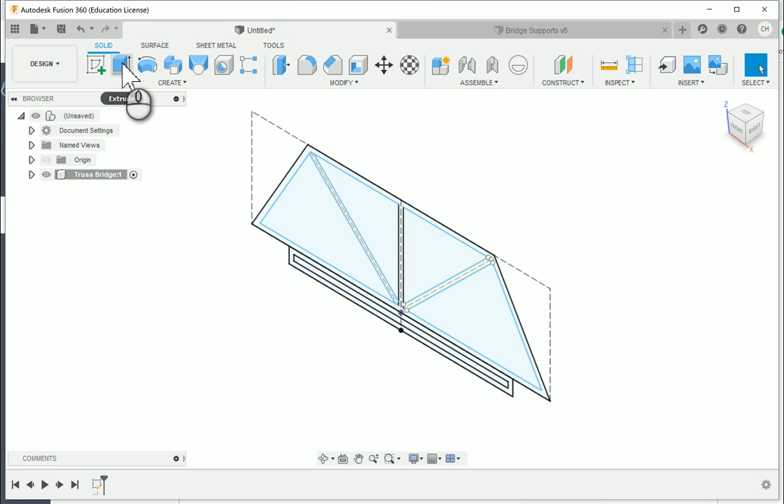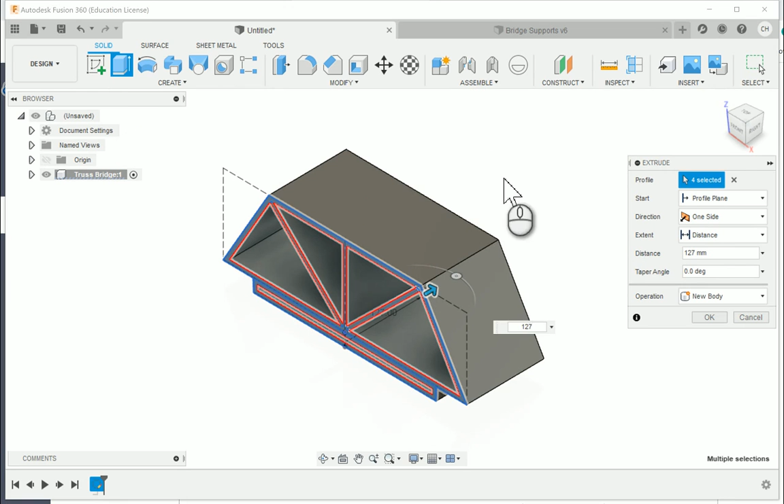I'm going to select my geometry, choosing these profiles here so you'll see this will go through. I want to choose the cross bracing as well as the area down below that I want to use for our particular projection. 127 millimeters is the width of our bridge, and I'm going to go ahead and say OK. This will go through and give me a truss bridge that's kind of solid like this.

Now, in order to accurately model this, I'm going to click Create a New Sketch, and I'm going to choose the work plane that would go through. Now what I can do is actually I want to go to Construct, and I want to go ahead and say for a work plane that is an offset plane.

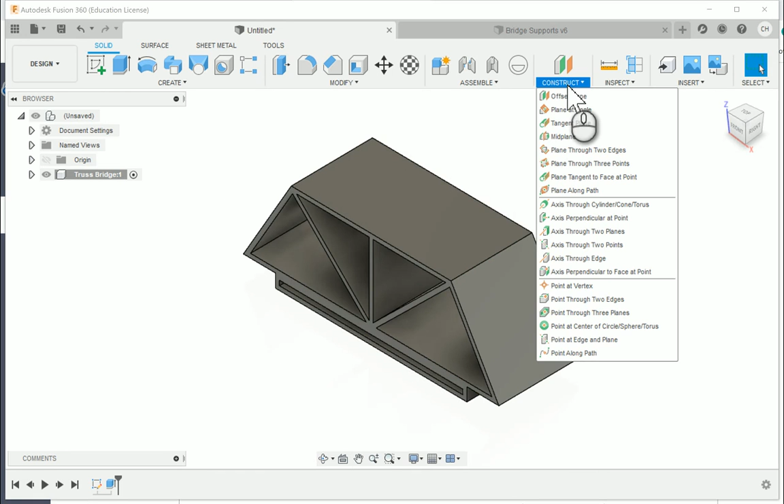And when I choose the offset plane, I can also zoom out here a little bit. Here we go. And I know that that's going to be 127 millimeters out to the very end, because that's right in the center. So I'm going to be right there on the edge. I'm going to go ahead and create a sketch right here on the work plane.

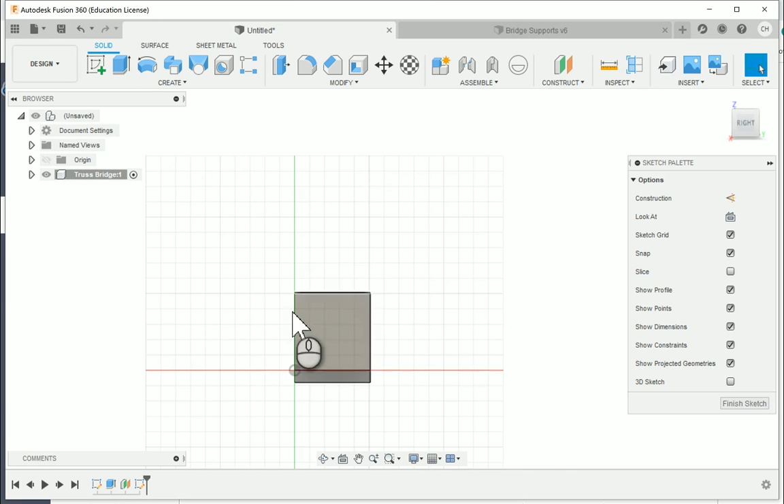Utilizing some of the geometry that I had before, I'm going to sketch a rectangle. So again, we're working with 1/4 inch material. You're going to notice maybe in some cases these purple lines here that are projection lines that are helping us keep the material in place.

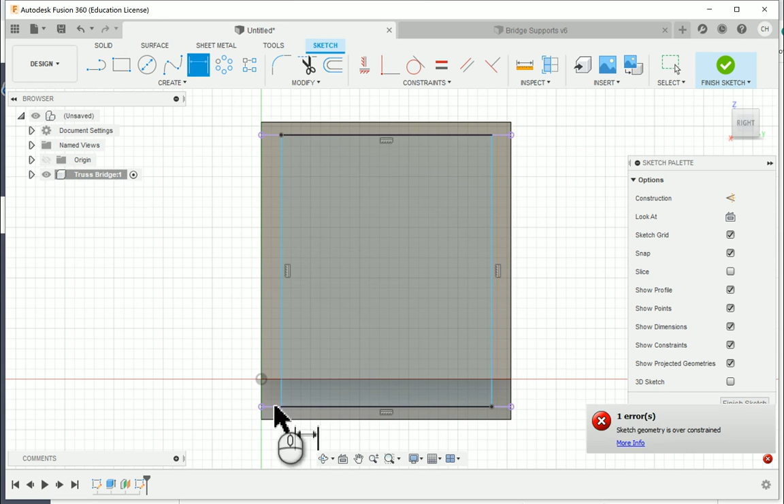Now I might want to check these dimensions and see, are they actually that 1/4 inch material that we have? But actually, we're going to see that's going to give us a driven dimension. I'm going to right-click on the purple lines to delete them. Now you'll see I have blue lines there to dimension to.

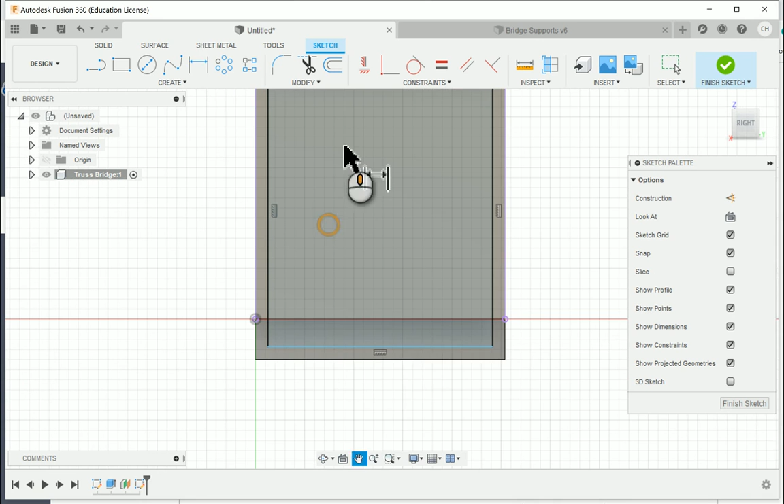6.35 millimeters is good there, to the outside edge. 6.35. I'm going to go around on all the edges. And I could have offset this as well to go through and make that happen. Okay, I get 6.35 all the way around, finish the sketch.

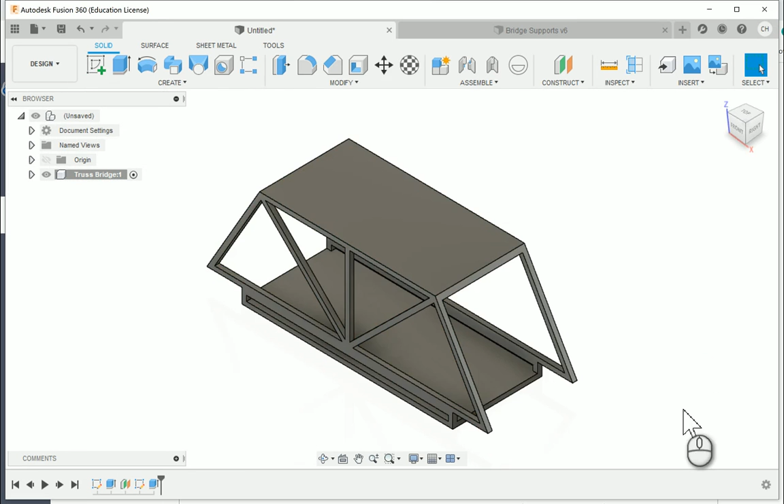Now what I'm going to do is extrude, choosing this, I'm going to drag backward to cut through. And I'm going to go ahead and say distance all, and I'll say OK. Now I have a truss bridge here that will go through and give me the 1/4 inch material that I need.

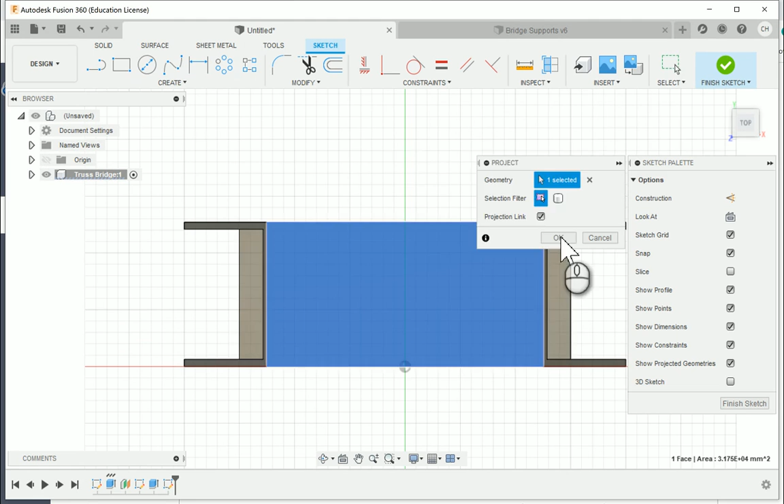I can also go through and take a look at creating a sketch on the top face, but actually what I also need to consider is, and here what I can do, go to Create, Project Include. I'm going to choose the top face here and say OK. Use the offset tool, choose the purple lines, offset a negative 6.35. Now I can finish the sketch, and I can extrude the shape downward.

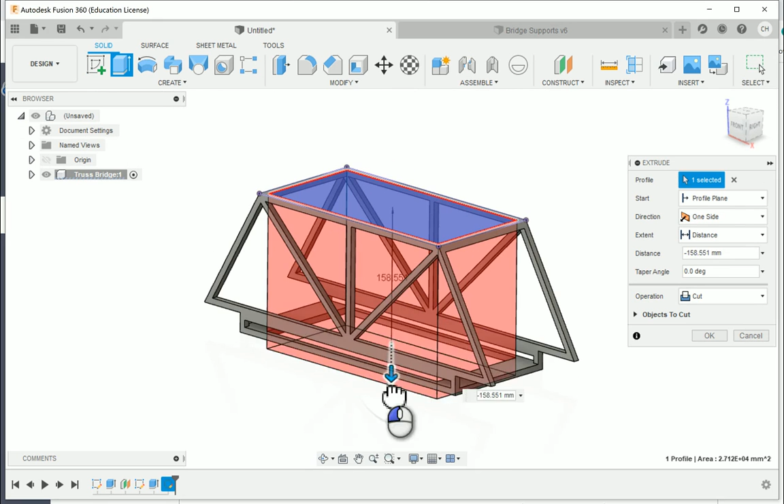Now, the only thing is I may just go through and stop because I'm still going to have to probably go through and do the bottom as well, the same thing. So I'm just going to go through and do a negative 6.35, which would give me the top cleared out. There is my frame there for my bridge.

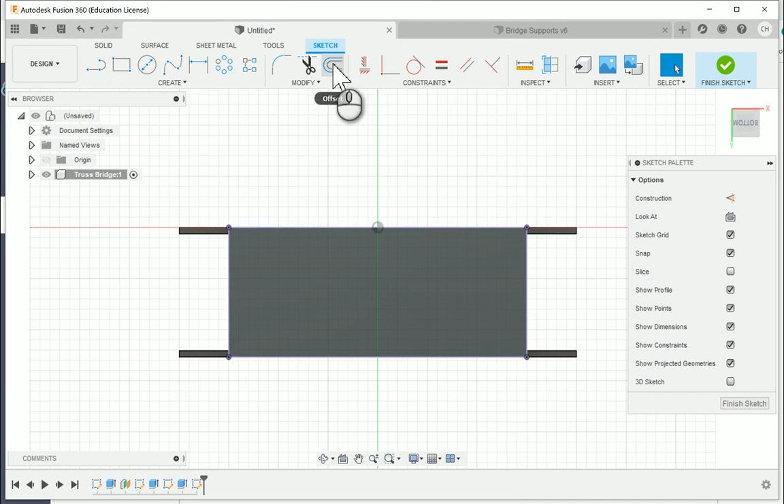On the bottom, create a sketch as well. I'm going to press the P key to run the projection. Click inside the shape and say OK. Offset, choose my purple lines, negative 6.35 millimeters. Finish the sketch, extrude, choosing the shape, and cutting up into the bottom.

So you'll see now what is left. And here I'm just going to say OK. So you'll see here's kind of our frame.

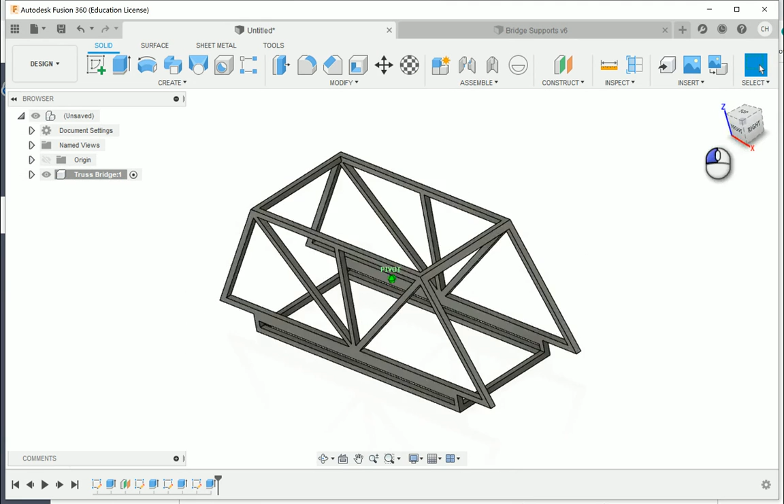What you can do from here is you may need to think about what are some other structural supports that you may need to help support the design of your bridge. So for example, I'm going to click the Create Sketch option, and I'm going to click on this inside face of our shape. And I'm going to go ahead and click and set a 2-point rectangle.

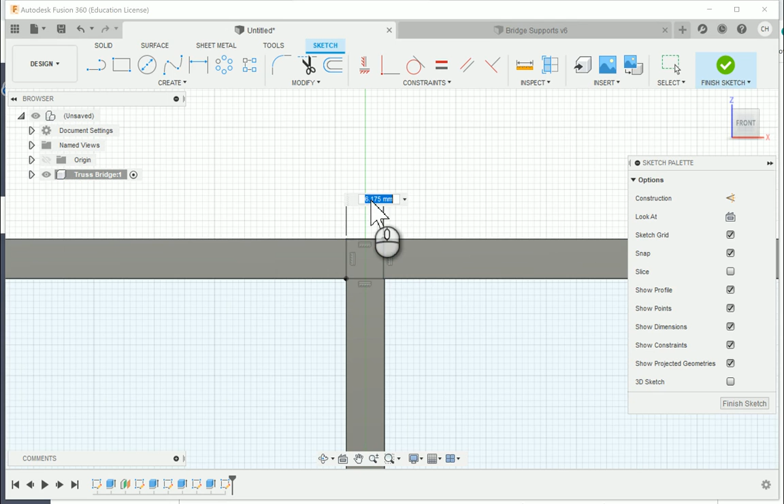This rectangle, when I dimension it, 6.35, is going to be our, and you'll see from corner to corner, will match. Now what I can do is I can say extrude, choosing the shape, but instead of distance, I'm going to say to object. I'm going to flip around, turn this model around and then choose the inside face of the other side.

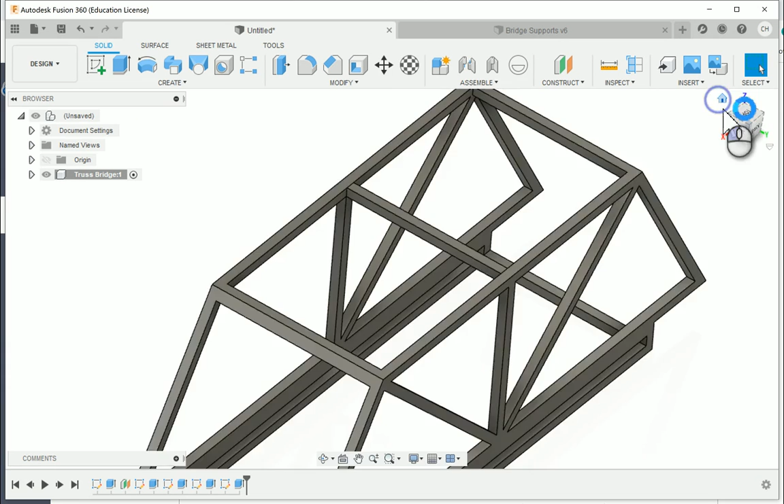And that way that will provide me a support right in the middle. So you can do this on all your, like here down the corners and some of the other features that you have, but this is the way that you can go through and design your particular truss bridge to make sure that it will fit within our particular constraint.